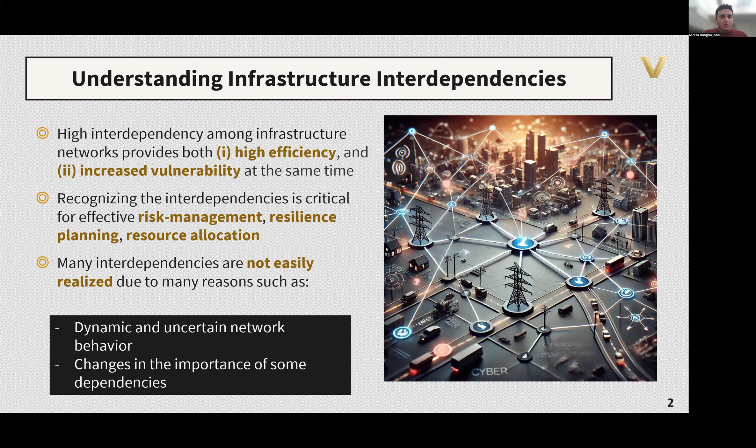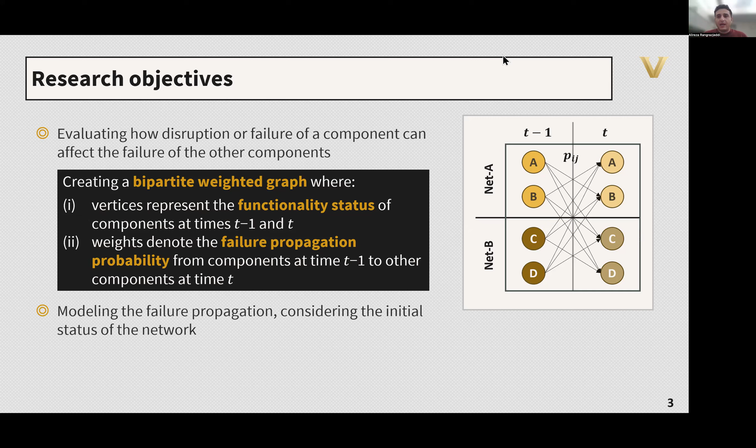And then using this probability and this graph, we can see how disruption propagation can evolve through the network during the time. So the problem that we have: the topology data of these networks are pretty much available. But the interdependent network disruption data, which gives us a dynamic disruption of the network through time, is not easy to find. It is pretty difficult to come by those data. So what we are going to do

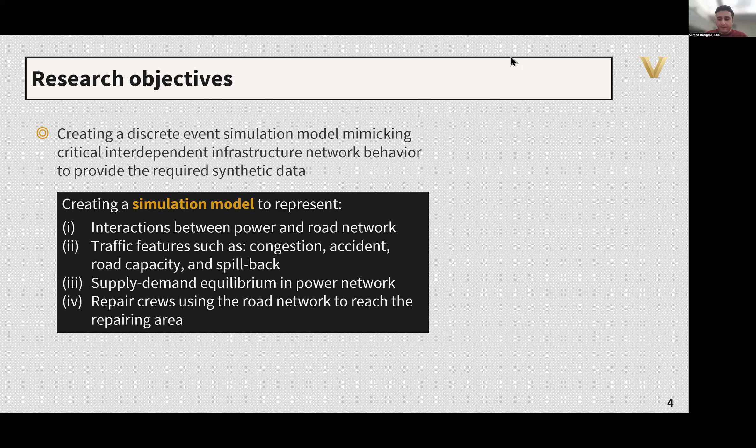For the power network, we consider the supply-demand equilibrium, and also we consider that the repair crews who are responsible for restoring the disrupted components are dependent on the road network so that they can reach the disrupted area in order to repair the disrupted component. So at the end, what we are looking for is this matrix, in which each element shows the functionality status of each component at every time interval.

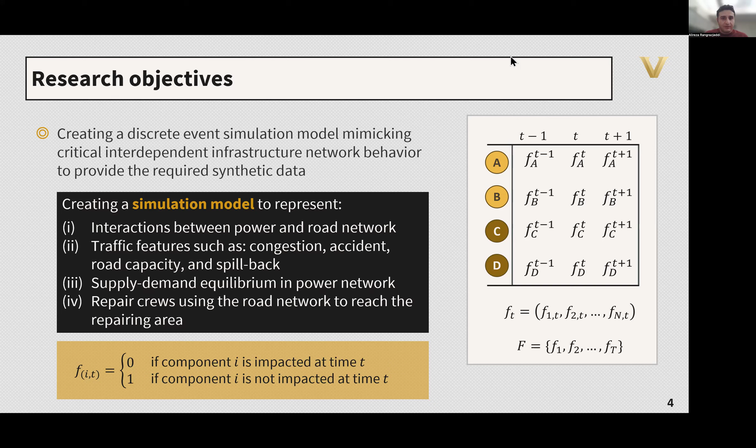So then, okay, let's have some definitions here. So we have direct initial impact.

So the power or road component can be independently affected by an external event like a natural hazard. And also we need some repair crews to go and repair these direct initial impacts. And these repair crews are dependent on the road network to reach their destination.

Now, as a result of these direct initial impacts, we're going to have some indirect impacts. So, for example, if we have some disrupted links, we can anticipate that we are going to have higher congestion in the system, and also the risk of accident will be increased. With respect to the power indirect impact, in the power network, all the time we need to keep the equilibrium between the supply of the power and the demand of the power.

So these indirect impacts, especially in the road network, are going to be temporary, and they're going to be recovered in a certain time. And also for the power network, repairing the directly affected components can restore the failed ones, which have failed just as a result of the direct initial impact.

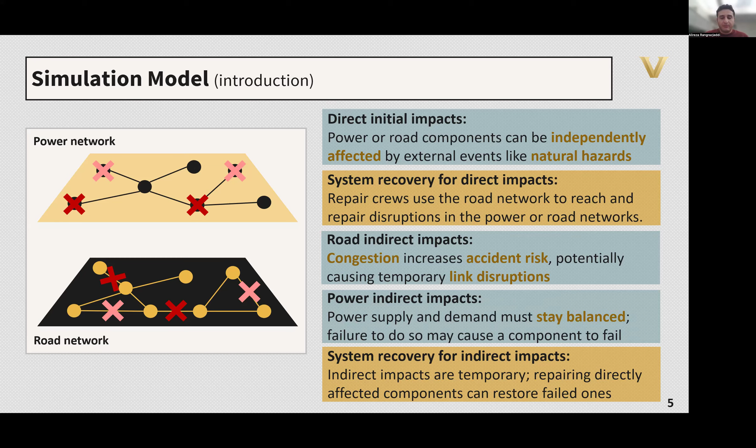So with respect to the interdependency, we define a geographical interdependency, in which each power component is tied to a certain location, and the corresponding component in the road network is going to be disrupted if that certain power node is disrupted. For example, if we have a power pole falling on the road and blocking the road, and it needs to be fixed, then the road corresponding to that power pole is going to be disrupted as well.

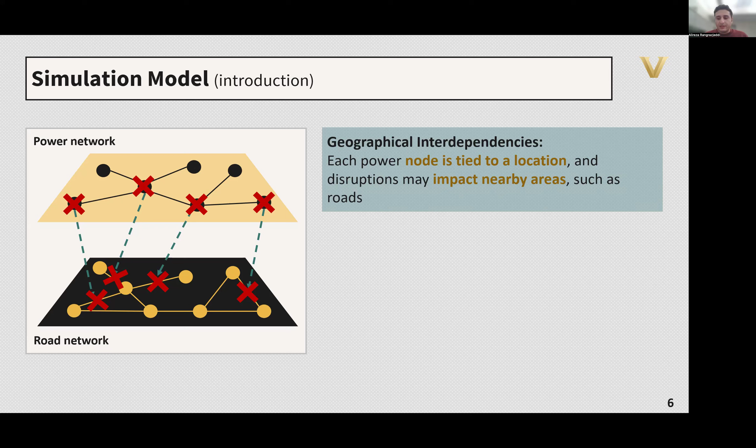Also, we have functional interdependency, in which a power component failure causes failure in traffic lights, and then we are going to lose some visibility in a certain district, so the risk of accident will be increased.

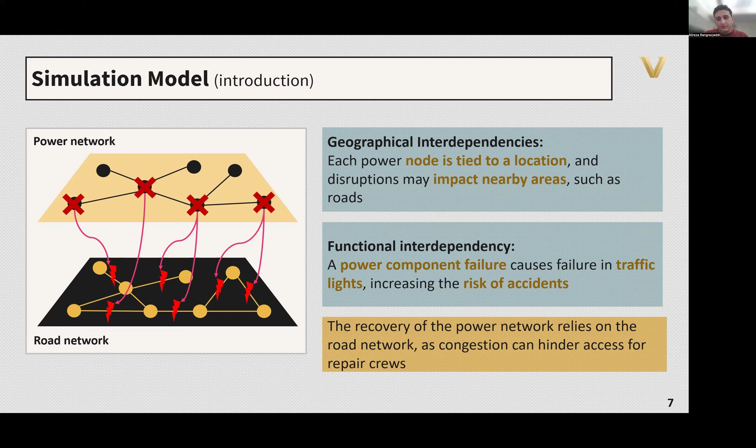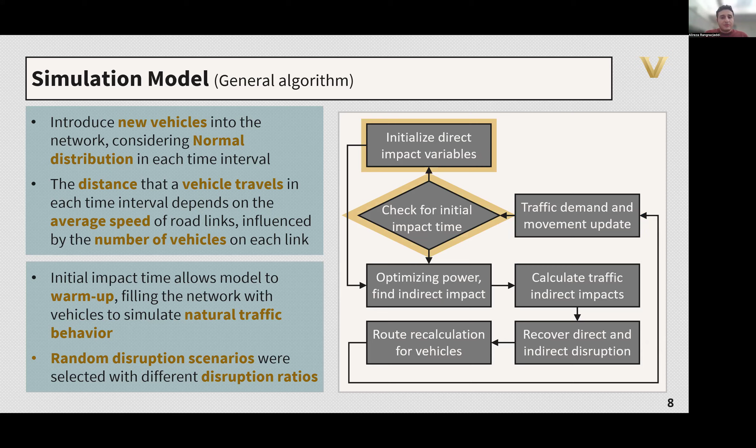So this is the general flowchart of the simulation model. At the beginning, we are going to introduce the vehicles into the system, calculating different features: the movements, the paths, the speed of the vehicles in each link. Then after the warming-up period of the simulation, we are going to consider the initial impacts of the natural hazard.

And after that we are going to capture the power network functionality, considering that the equilibrium between supply and demand should be maintained. And then after that, we are going to calculate the indirect impacts on traffic or the road network. Then we're going to consider the recovery procedure of the network. We consider that road accidents cause a temporary blockage that will be resolved after a certain time, and also repair crews respond to initial direct disruptions, navigating through the traffic network.

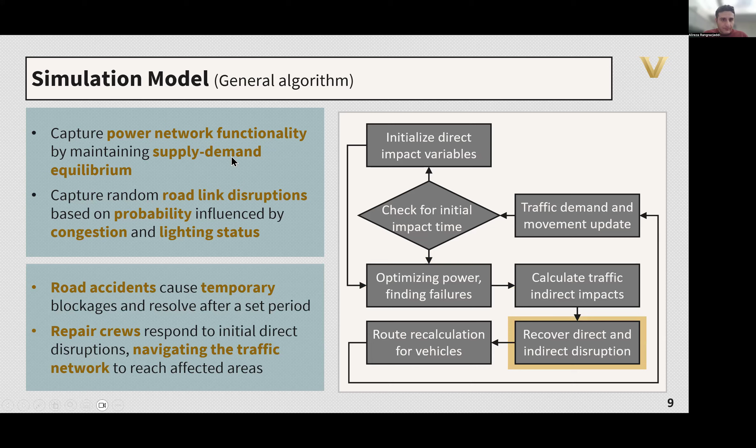So for the power supply and demand equilibrium, we consider this optimization model. The first objective of this optimization model is to provide power to all demand nodes as much as possible at every point in time. Also, unmet demand leads to failure in the power network and the associated links in the road network.

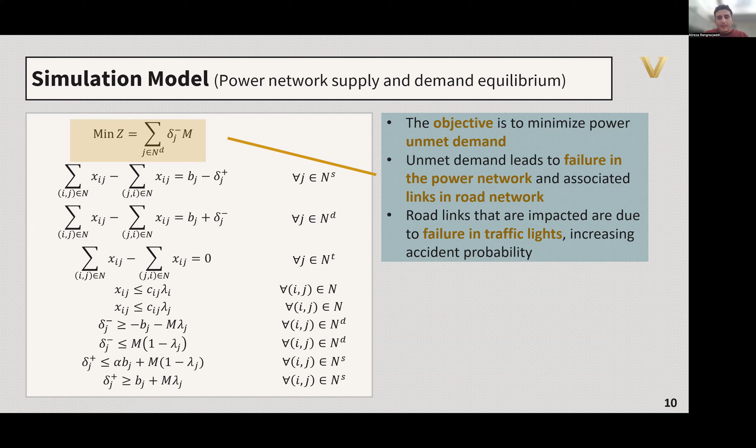And then we have different sets of constraints. The first part is for maintaining the balance between the components of the power network, for example, the supply nodes, demand nodes, and transshipment nodes. And the second part is to make sure that if we cannot provide enough supply for a certain demand node, that node needs to fail or go offline.

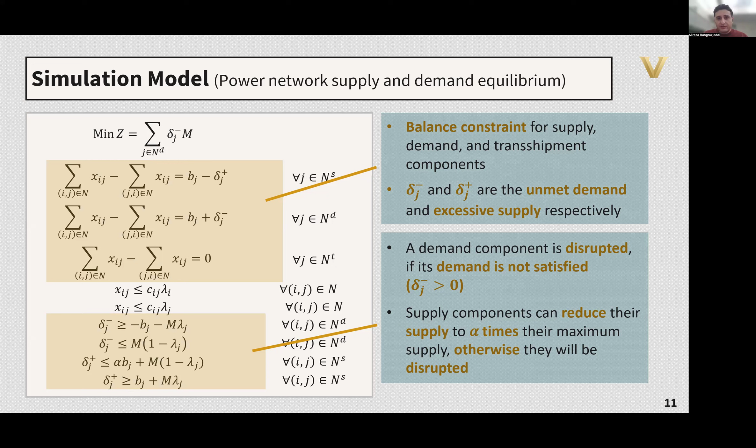And the supply nodes can in fact adjust their supply to a certain limit. If the demand in the system decreases more than a certain limit, they also need to go offline, so that we are not going to supply more power than is needed to the system. So this was the optimization model that is solved in each iteration of the simulation, so that we can see the situation of the power network.

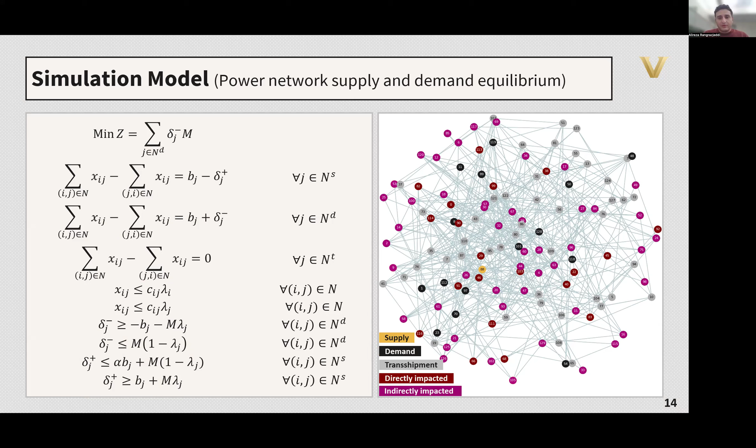Now, this is a power network example that we have here. This is the situation of the network at the beginning. These are the nodes which are directly impacted, and as a result of these impacts, we're going to have these nodes in the power network which are indirectly impacted as a result of those directly impacted components.

Now, for the road network, we can define different resiliency metrics, but this is one of the resiliency metrics that we define, which is related to the speed of vehicles in our system. So we have a maximum ideal speed in each link. As a result of congestion, this speed will be diminished.

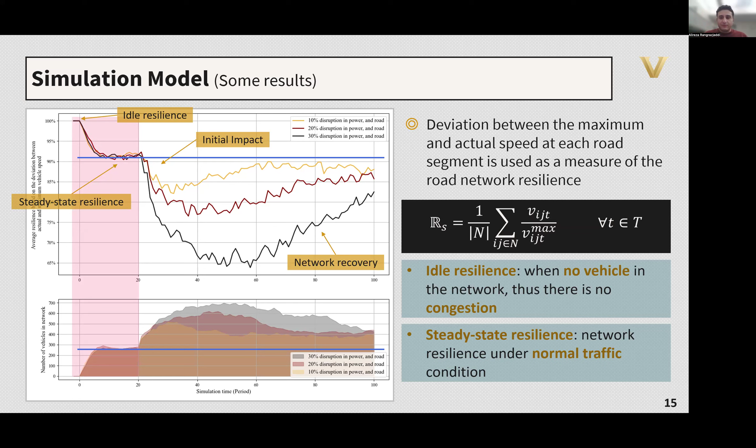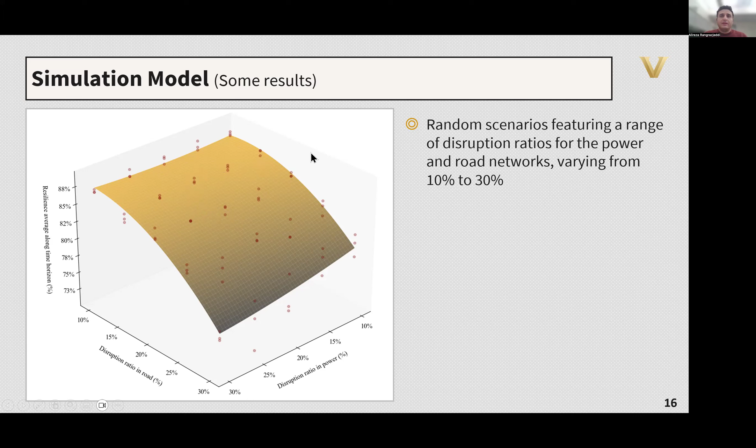So then when we take an average over the whole time horizon that we consider, we can have the resiliency for different disruption treatments. For example, we have different levels of disruption in roads and power, and then we found this response surface for that, and the takeaway that we can have from this response surface is that initial power disruption ratio has minimal impact on road network resilience unless the road disruptions ratio increases.

I can say simply that the road network resists to some amount. So we can say that if the road network hasn't been disrupted a lot, disruption in the power network doesn't have a lot of effect on the road network. But when we have high disruption in the road network, we can see that disruption in the power network also affects the road network more. So it is evident with this slope that you can see.

When we have a low disruption ratio for the road, the relation is not pretty much significant. But when we have a high disruption ratio in road, we see that the resiliency drops more. We can see this slope here.

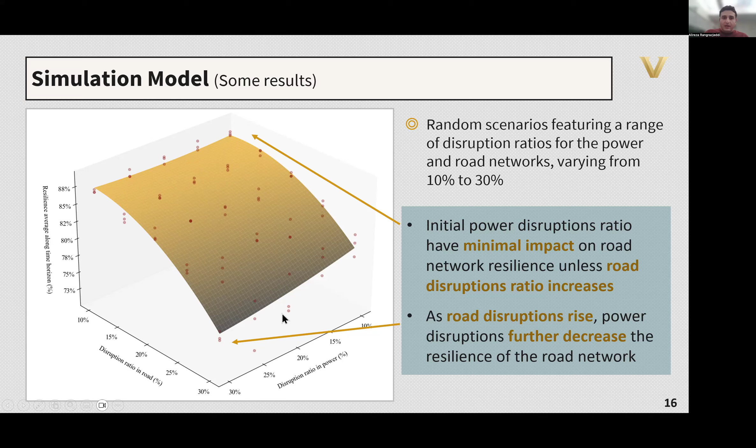Now that we've done our simulation model, we wanted to get back to our primary objective. So the goal here is to determine if the component, for example, A, will be impacted at time t, given that we have the information with respect to the functional status of each component at time t-1, or the previous time. So the objective is to see if this certain component is going to be disrupted or not.

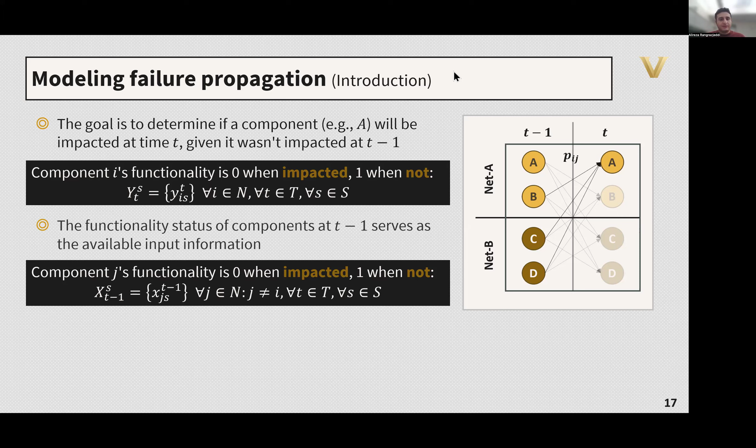So we define a target variable representing the functionality status of that component, and then as an input we have the functionality status of the other components at time t-1. So considering this, we have this data configuration, which has our features and also our target variable. Then after preparing the data, we have everything ready for doing some sort of machine learning.

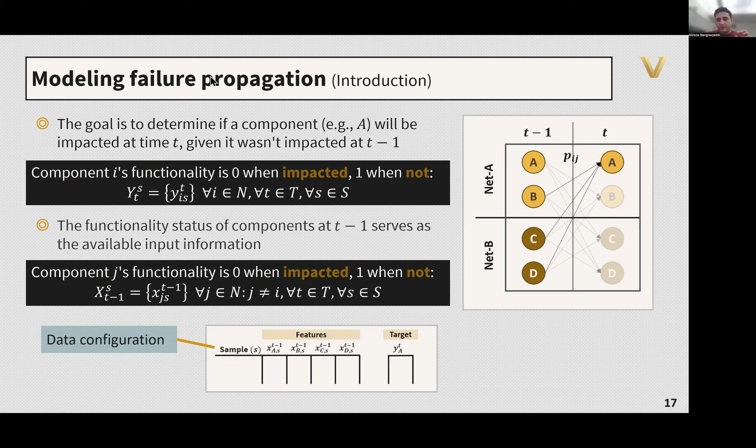So here we use logistic regression, and this logistic regression gives us a kind of regression function, and then utilizing the coefficients related to that regression function for each of those features or variables, we can come up with some sort of disruption propagation probability of having different disrupted components at time t-1, and then see their contribution to the disruption of our target component.

Now, these coefficients can be positive or negative. Using these coefficients, we can use this formulation in order to calculate the probability, to see how these combinations of the functionality status of the components at t-1 are going to affect the disruption of a certain component in the current time. So for doing this, we just gathered the data from our simulation model.

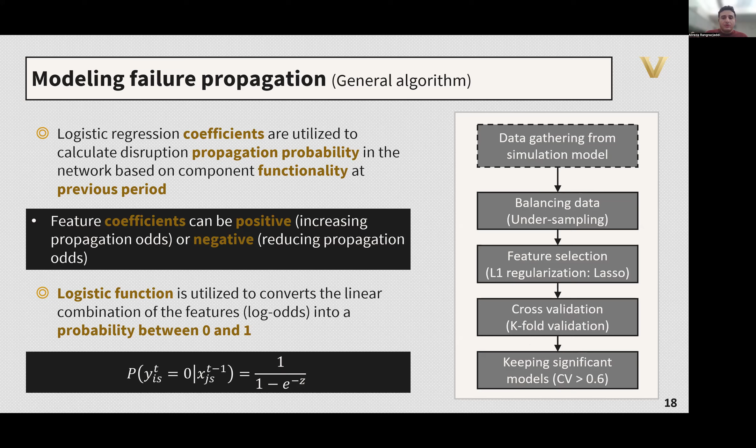Therefore, we use the regularization, and then I've done the cross-validation, and then only kept the significant models which had the accuracy or cross-validation more than 60%. Using this methodology, we found 150 components which had the cross-validation score.

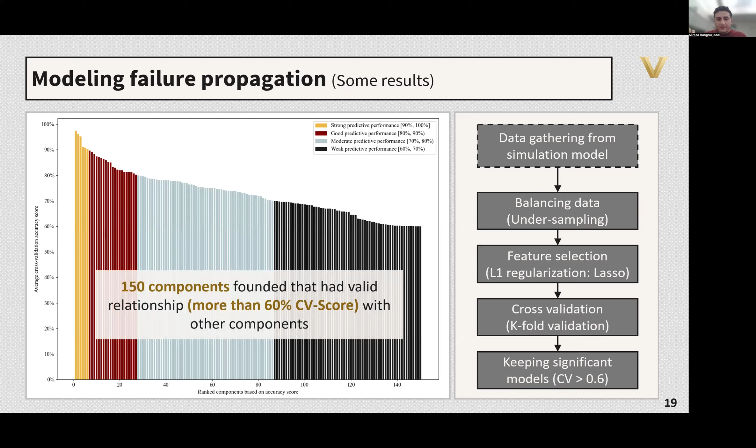We found more than 150 components that had relationships with other components in the network, which had a cross-validation score of more than 60%. Now, using these probabilities, this was the disruption propagation through the network.

So the conclusion of this work is that we use the simulation model to, in fact, realize the interaction between the power and the road network. And also we use the machine learning model, the logistic regression, and use those coefficients in order to capture the relationship between the disruption of one component and the other components.

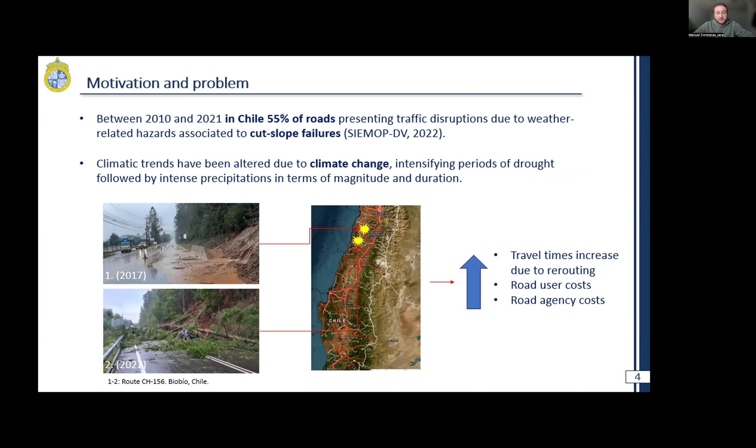Another important point is that this research is part of the research project entitled Development and Application of a Traffic Interruption Model due to Road Slope Failures Caused by Extreme Weather Events, in which 2 universities take part: the Pontificia Universidad Católica de Chile, where I'm doing my doctorate degree, and the Universidad de Concepción, which participates as a partner institution. At the same time, institutions such as the Highway Agency of the Ministry of Public Works and the Associated Public-Private Partnership are important institutions related to road management in Chile.

This is the methodology of the research. It's divided into two modules. The first one has the objective of estimating the effect on the operation of the road network due to landslides or slope failure. And the second module is to estimate the landslide risk of the road network from the point of view of increased travel time or delays, which can be applied to select the sites where damage mitigation is required. The first module considers 5 stages.

The first is modeling the hazard, in this case the rainfall or precipitation. The second is a hydromechanical analysis of the slope, which involves estimating how the water infiltrates into the slope and how the saturation degree varies within it. Then in the next step, we perform the slope stability analysis and check if failure occurs given a certain rainfall scenario. In the fourth stage, the slope failure probability curves are estimated, where by iteratively performing the stability analysis for different rainfall scenarios, we obtain the probability of failure of this slope with a certain geometry and soil type, given a certain amount of accumulated rainfall, for example.

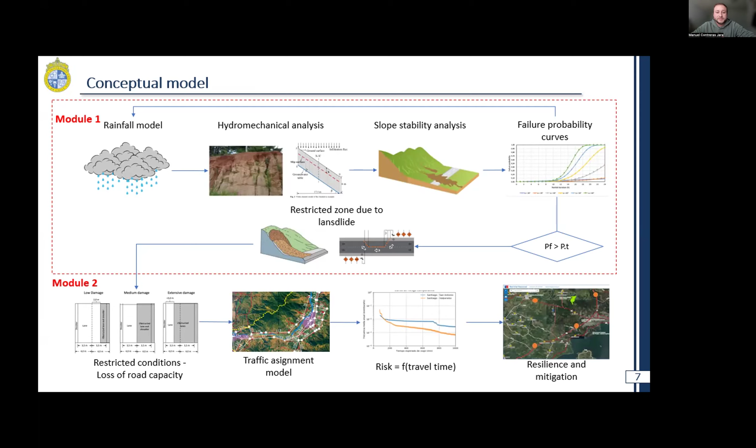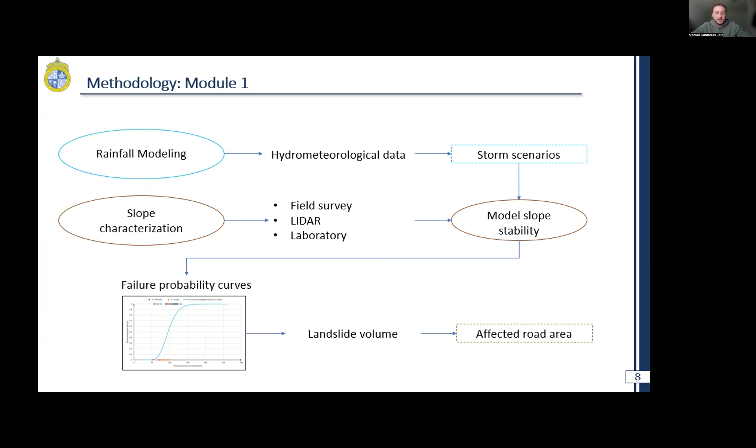So in this presentation, we'll focus on the first module. As I mentioned, it has 5 stages. It first considers the analysis of the hydrometeorological hazard to define the storm scenarios. The second is the slope characterization based on field surveys, LiDAR surveys, and laboratory analysis to obtain, for example, the geometry, the soil type, and the permeability. Then with this information, the slope stability analysis is carried out, and finally the failure probability curves are estimated, and the landslide volume if the failure is complete.

Then for the development of the model and its validation, the road network of southern Chile used for this study is in the Biobío region, in this part of Chile. 2 roads with different categories were studied. The first is a highway with a length of 88 kilometers and a traffic of 5,200 vehicles per day. The second, in the south of Concepción, is road number 2. It's a bidirectional road with a traffic of about 4,000 vehicles per day. Both roads are located in a forested area and have had fires in recent years, which has changed the vegetation cover of the area.

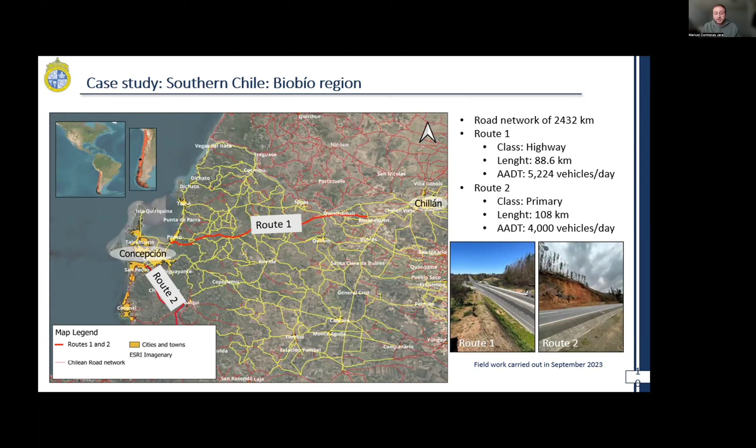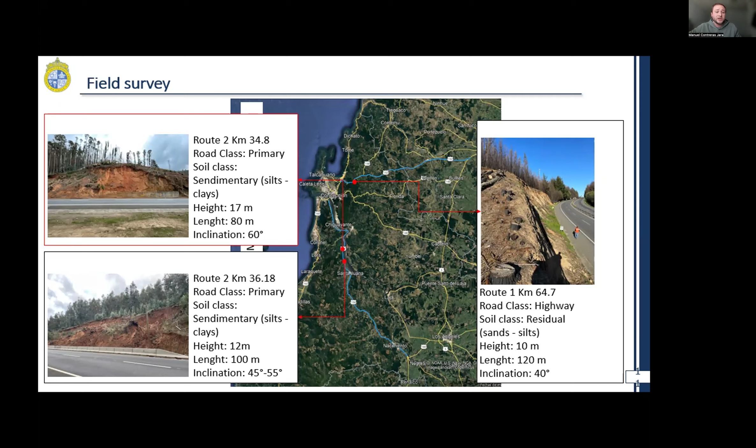In the case of road 2, for this road we selected 3 slopes. The first slope in road 2 has a sedimentary class of soil, as does the second slope. And the third slope we select is a residual slope. The range of the height of the slope is about 10 meters to 17 meters, I think, and the inclination is 40 degrees to 60 degrees.

Then the rainfall: following the methodology, the analysis of the precipitation was performed based on the meteorological information selected in this area. Then this information was corrected by the ERA5 reanalysis, which provides information on typical duration and the total amount of rainfall per event. Then the intensity, duration, and frequency curve was created.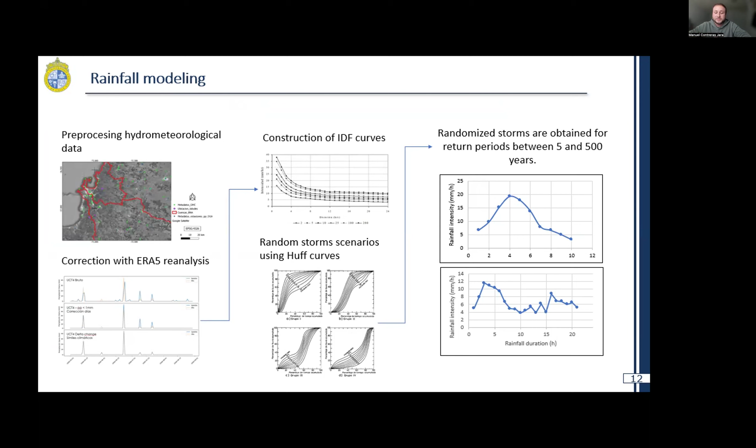As for the slope characterization, we carried out a field survey. For example, with the electrical resistivity analysis, we obtain the soil resistivity and at the same time the water level in the slope. With a seismic geophysics analysis, we obtain the soil stiffness, and with a differential GPS, we obtain the geometry of this slope. And with a LiDAR survey, we obtain the geometry of the post-failure condition of the slope.

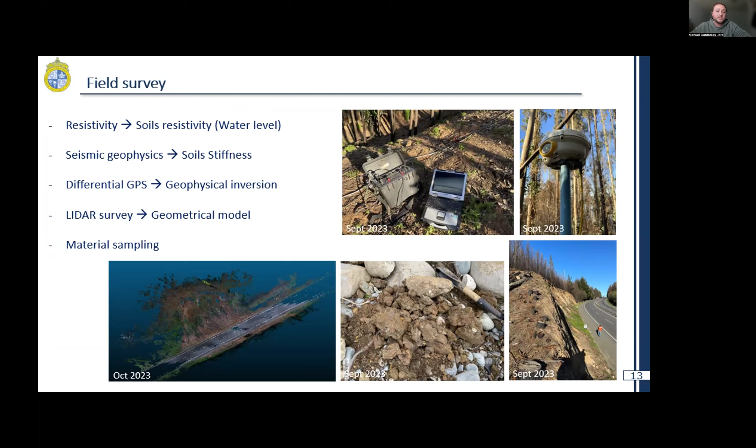And we did some material sampling to work in the laboratory. Samples collected in the field were analyzed to determine the mechanical and hydraulic properties. These are necessary for the simulation in the software we use, Plaxis 2D, in which the hydrometeorological, hydromechanical and slope stability analysis was carried out. Some of these laboratory results were the slope, the failure envelope, and the soil water retention curve.

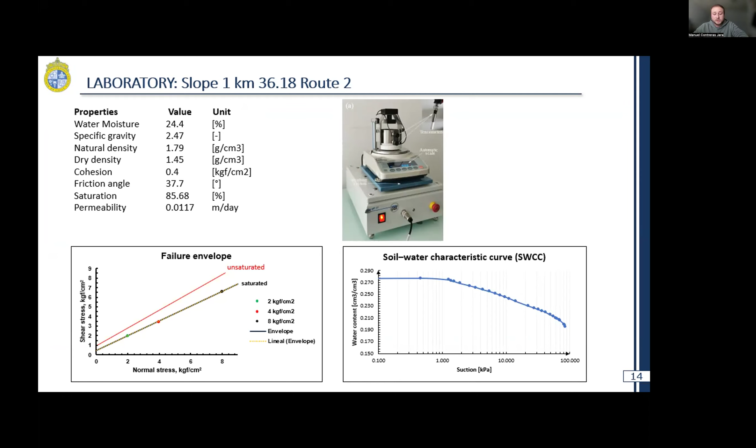Then, with this information, the slope stability is simulated, and we analyze when the factor of safety is less than 1. This is the failure condition. You can see this video. This video, for example, represents how the saturation is changing for this rainfall pattern.

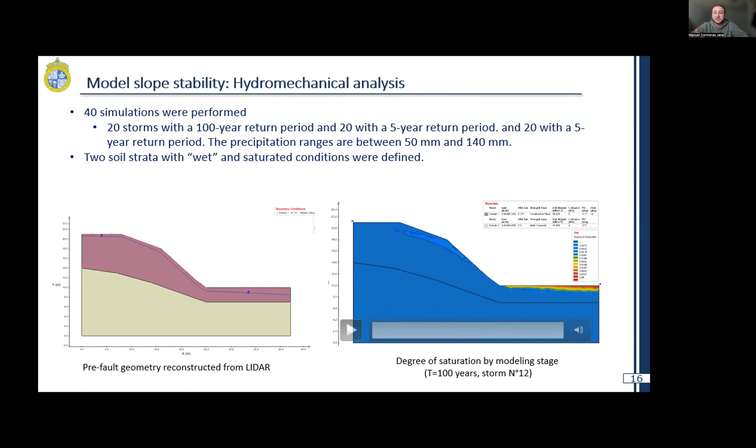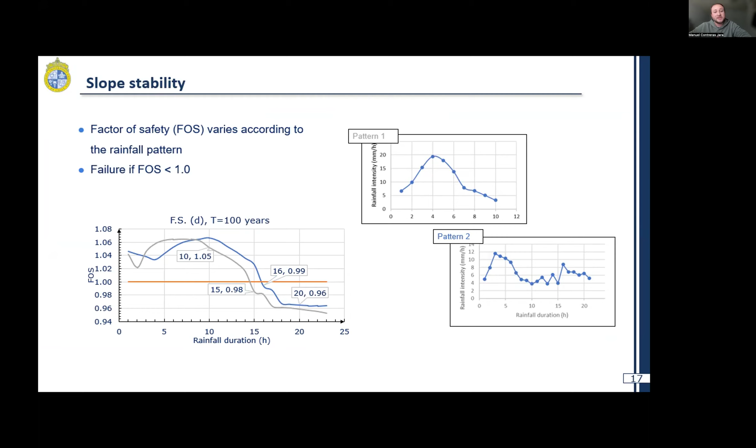As a result of this project, this is the failure probability curve. Finally, after several models and runs of the different rainfall events, the probability curves for each slope are obtained, in this case slope 1 and slope 2. The curve was fitted to a lognormal distribution as a function of the total amount of rainfall for these patterns.

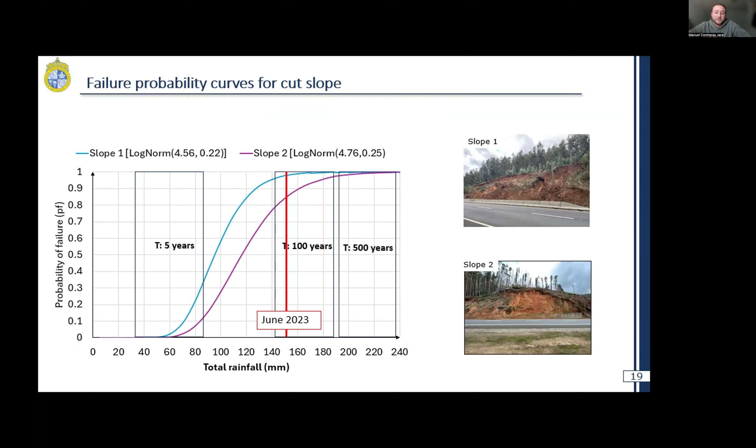As an example to validate this curve, we use the event of June 9, 2023, with this slope failure. So we can see that according to this curve, the probability of failure is greater than 80%.

As a work in progress, I'm working on the next stage to estimate the volume of the failure surface that slides onto the roadway. What is the effect on the road? For this work, we are using material point methods, but we are just getting started at this point.

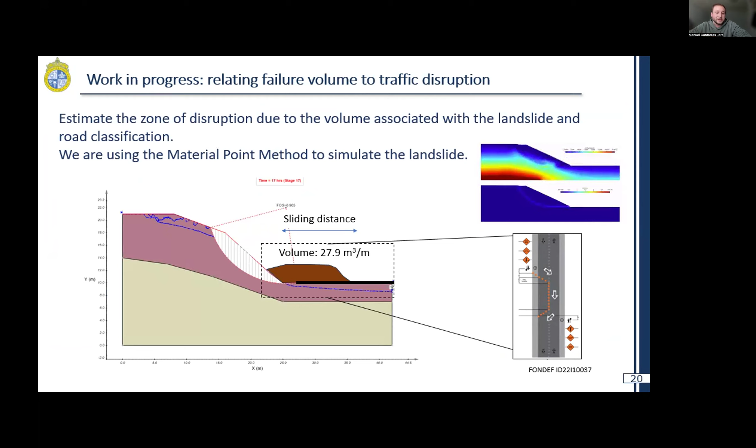The idea is to obtain what is shown in this figure, but depending on the geometry of each slope and the type of soil, we will have different states of damage. For example, reducing velocity, blocking zones, or causing intensive damage when the road is closed in both directions, for example, for two-way roads.

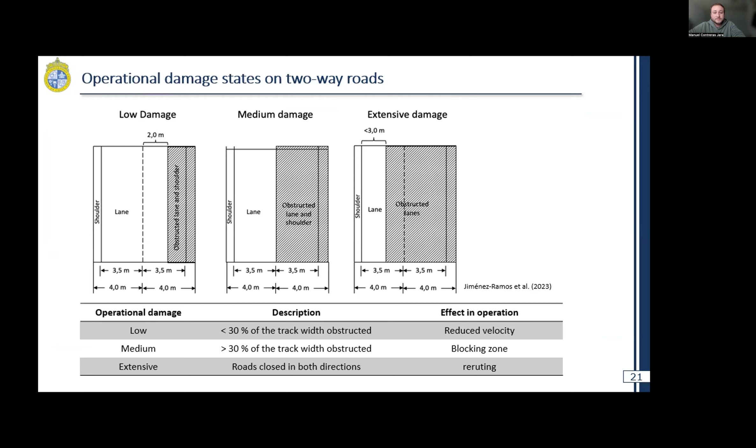Another work in progress is the extrapolation to the network level. This involves considering more slopes, geometries, and different soil types, and adapting this curve according to how it rains in different parts of the region, in this case the Biobío region. For example, in the coastal zone it rains much more than in the central zone of Chile, and the duration of this precipitation is different.

First, we consider different types of soil. In this case, we consider silty loam soil, sandy loam soil, and clay loam soils, because we use the USDA classification, since we work with agronomists, so it's better for us.

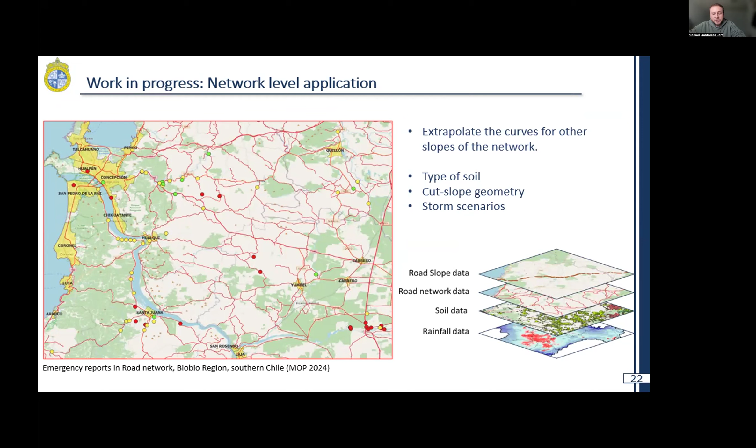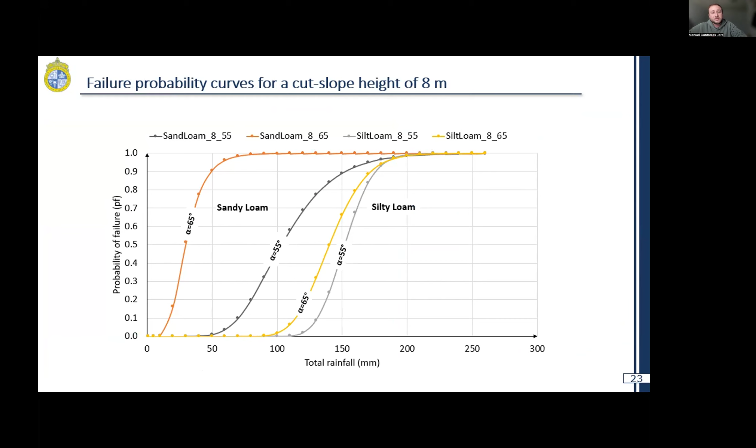This is an advance of the simulated curve for a network level. We have, in this case, curves for a slope height of 8 meters and different inclination angles and two kinds of soils. In this case, sandy loam, this is the curve, and for silty loam, these are the curves. This is more.

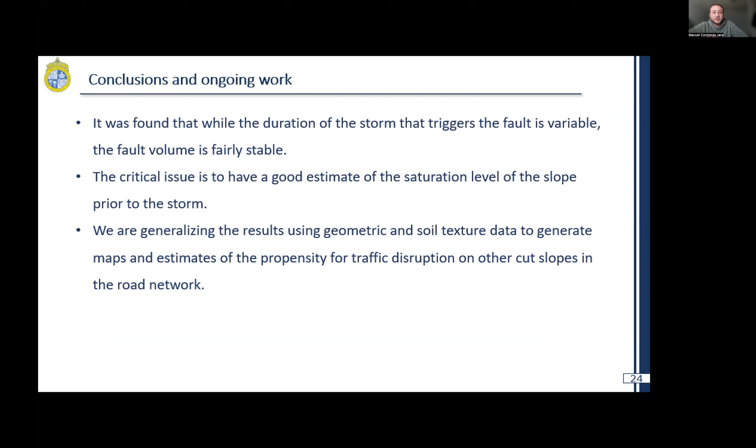So we found some conclusions in this work. We found that the duration of the storm that triggered the failure is variable, but the failure volume is fairly stable. The critical issue is to have a good estimate of the saturation level of the slope. It is really important to simulate the hydromechanical behavior of the slope. And we are generalizing the results using geometrical and soil texture data to generate maps and estimate the propensity for traffic disruption in the road networks.